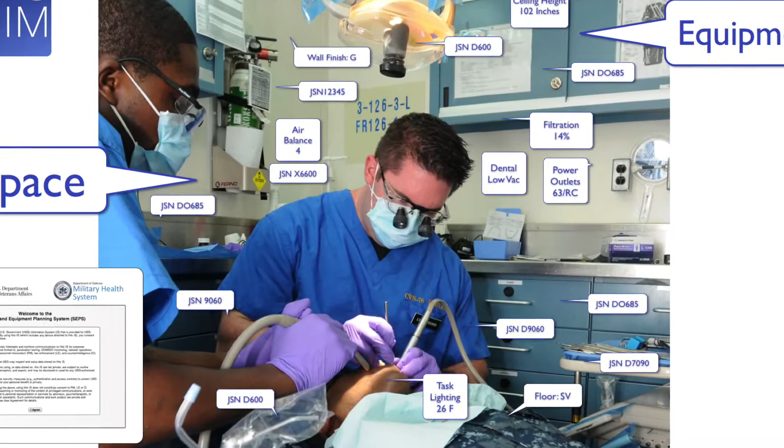The DoD and VA jointly manage a 210 million square foot portfolio, and the SEPS system is used to define the requirements for healthcare facilities and the equipment inside them. Very complex data, and this data was only accessible to internal users.

Just like a defense satellite system can be opened for civilian use, certain parts of a facility's data can be opened up as a service as well. That's what happened with SEPS. The knowledge base was structured in a way to be shared.

White House directives for digital government using Silicon Valley strategies were used as the foundation for the SEPS strategic plan, defining the three-tiered architecture of moving SEPS data into an open and accessible format, layering a secure data service on top for apps to be built on, including the Space and Equipment Planning System, now called SEPS2BIM, and other BIM and non-BIM applications. The result is a level 3 in the cloud implementation of BIM tools.

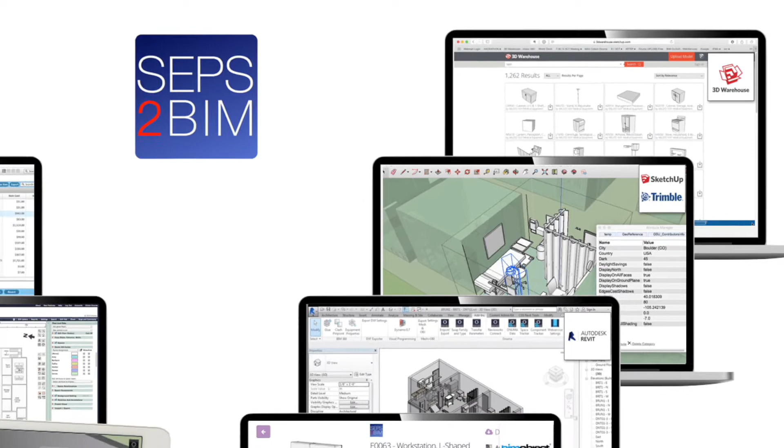Data services to SEPS were then rapidly opened up. We did not require the SEPS development team to understand BIM or IFC or any of the standards. The first step was to take their data and web service enable it. Then other applications and vendors, within a few short months, started linking into the exact same data service with their BIM tools.

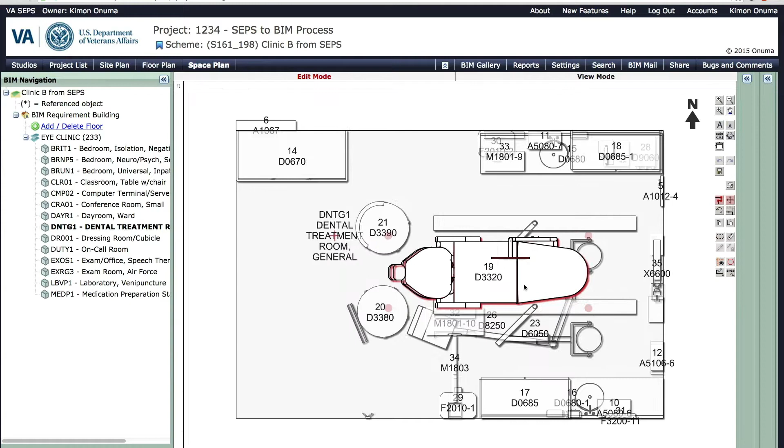So they were able to then translate SEPS data into their formats. 3D Warehouse took their equipment data objects and converted them into a 3D Warehouse format that then linked into SketchUp. A dental chair like this was made accessible with the same data. The Onuma system on the web used the same data as well. All the data coming from the same service aligned the different tools.

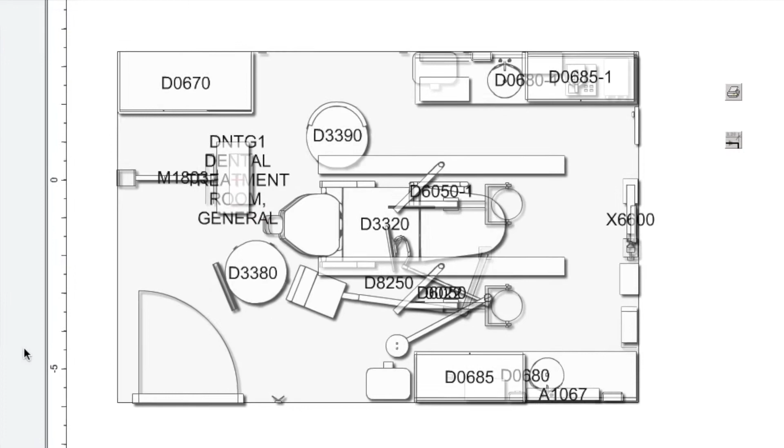The SEPS2BIM utility, you can go online, and without any login actually, you can put in your information and call up a standard equipment and room type, and that can then be moved into other BIM applications as well. The simplicity of use was critical. Other applications like iPad applications then use the same data as well. This happened within a few short months after the data service was made accessible.

BIMobject then took the same data and made it available in different formats, including IFC. In other words, what started as structured data in a non-IFC format is now available in IFC as well. Attainia, a non-BIM application with 40,000 pieces of equipment with attributes, about 200 attributes each, also linked to it very rapidly without even needing to understand anything about BIM.

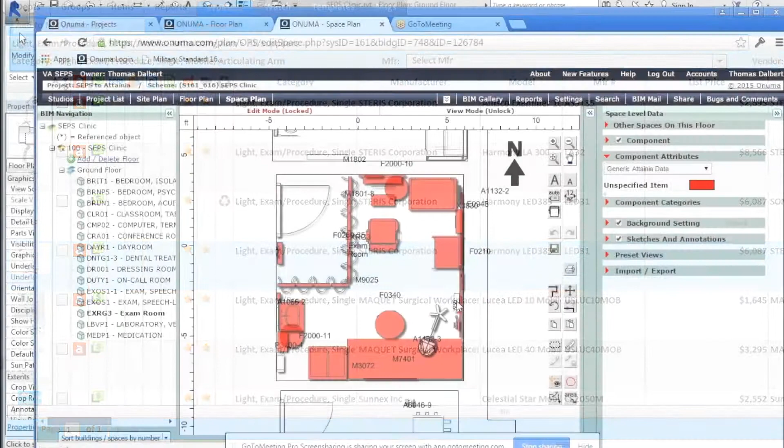Their data then flows into other BIM applications as the connections are made. So if you open up another application that links to Attainia and links to the SEPS data, you can see the Attainia data actually pop up from the equipment list. So the end user doesn't have to be bothered with the complexity, but all of a sudden they have access to rich data that allows them to make decisions about the medical planning process.

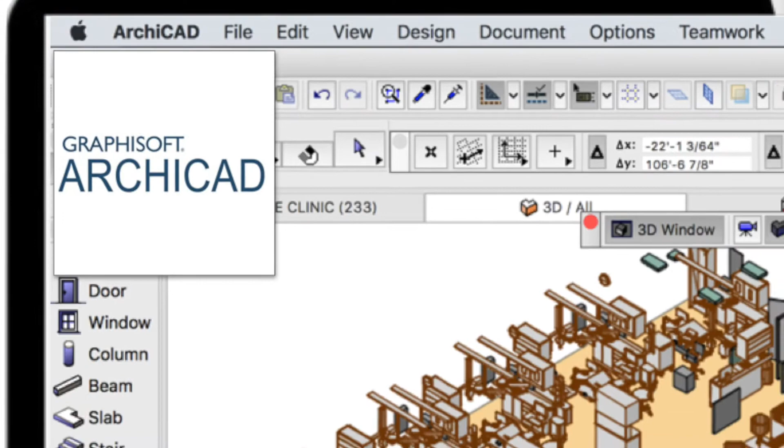Revit, the same thing, with APIs connected to the different web services, can see the same data and equipment. ArchiCAD then aligned their objects. The result is now multiple vendors all aligned with the owner's web service data for equipment and spaces. This level 3 BIM implementation of owner data in the cloud is a huge first agile and lean step.

It is an approach that can be expanded for any building type, not just for healthcare facilities or large owners. And it is not one system or one BIM or even one format like IFC. It is an ecosystem of data and systems and functionality that can be expanded over time, and it is ready to be used. This is an incredibly exciting time to be in the building industry.

Transparency and collaboration are going to be key to move the industry forward, and we invite you all to join us. For those that are ready to change things, there's a way to start.